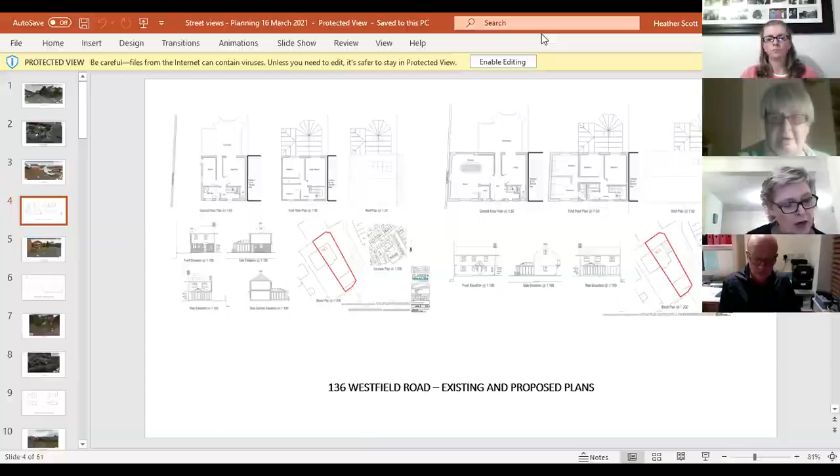The proposed 2-storey side elevation flank wall, due to its being built up to the boundary, appears to be overpowering and dominant on the street scene of Beeching Close, creating a possible loss of amenity to neighbouring properties within the vicinity. I express concern that the proposed 2-storey side extension is an over-dominant feature on the street scene, creating a possible loss of amenity to properties in Beeching Close. Concerns are also expressed with regards to insufficient on-site parking provision for the additional proposed 4th bedroom.

Thank you. And there were no letters of objection on the website at all. Okay, can I invite comments, councillors?

Yes, thank you, Rosemary. My question is, if the property is going to be built up to the side of the boundary line on Beeching Close, then does that not affect those trees along that side? And if it did affect those trees, what proposals are there for replanting under the neighbourhood plan? It may not affect the trees, but it looked to me very unlikely that it wouldn't.

Secondly, if the trees weren't there to screen it, would there be any overlooking to the properties across the road? Well, they haven't put in anything regarding replacing the trees, and that particularly was my concern, hence the reason I've put that it's going to be dominant and that it is going to be a loss of amenity.

Down to councillors - Nigel. Thanks, Chair. I concur. I've looked at this one, and my reaction is it's slightly overdevelopment. I think the idea of going right to the boundary - even if it was a metre back, so there's a passage down, would make all the difference. I think right up to the boundary is a no-no, I think it's overdevelopment. Plus the parking point.

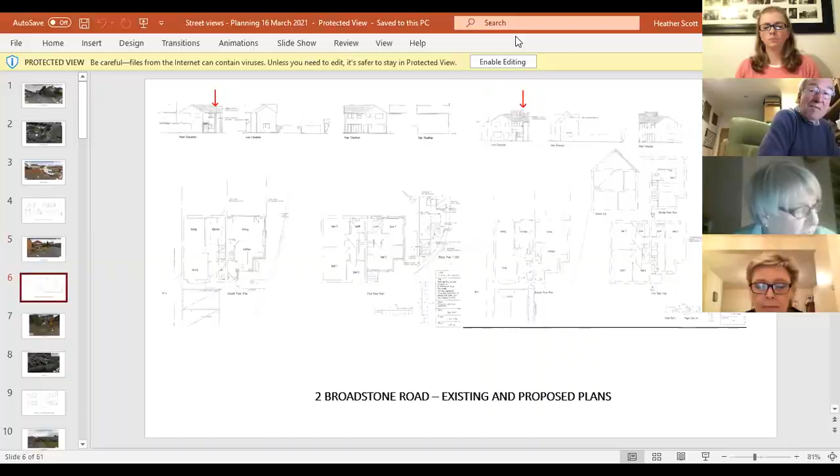Thank you. First of all, apologies councillors, this was actually the application where there were several objections online. I managed to turn over 2 pages, so I was reading wrong notes, but there were several objections online for this, just to mention. Quite a few were to do with concerns about safety, given its siting on a bend, but some also are about loss of amenity due to overdevelopment of the plot. Yeah, that's correct, on the site.

So John, do you want to comment? I was just going to say, I couldn't quite see because the plans are quite faded on the PowerPoint. I was thinking, where exactly is going to be the crossover and the access to the road? Because I do know that bend very well, and it is particularly tricky. I just wondered whereabouts, you know, to go back to the picture of the house, is it towards the front? At the moment, I think the access to the garage is at the rear. I wasn't quite sure exactly where the crossover was going to be.

Right, yeah, from what I remember looking at this, I think it was going to be further around the corner. Yes, I think from memory it was sort of in this location here. That's right. I mean, I think actually that's where the garage is anyway. But I think that is actually still quite tricky because you can see people coming down the left of this road here, straight down onto that corner there, it can be quite tricky.

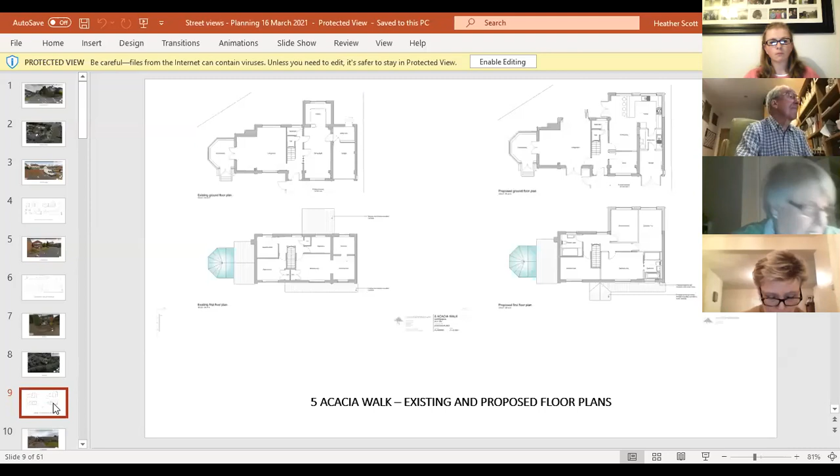Before I go into the details, just to let you know that a letter of objection has been received from number 49 Eastmoor Park. This property is currently a 3-bedroom detached bungalow with an integrated single double-length garage, set in a cul-de-sac which consists of bungalows at the end with larger, more dominant properties towards the beginning of the road. This particular part of Eastmoor Park appears to be fairly narrow.

The existing 3 bedrooms are housed in a loft area at the rear of the property. The proposal shows a first floor front gable over the existing garage, to include a dressing room and ensuite for the master bedroom, with a large glass window incorporated into the design. However, as no obscure glazing is detailed on the plans, there are concerns that this part of the proposal may affect the amenity of neighbouring property number 136 Eastmoor Park, sited directly opposite.

The proposed front dormer will accommodate a 4th bedroom. There are concerns that due to the narrowness of the road, there could be a possible loss of amenity also to number 136 Eastmoor Park due to loss of amenity and privacy. The proposed single-storey rear extension extends current habitable accommodation, with the garage area being altered for gym, utility, shower and office areas. With the loss of the garage and the proposed change from a 3 to a 4-bedroom property, there still appears to be sufficient parking provision on the front. No trees will be affected by this proposal.

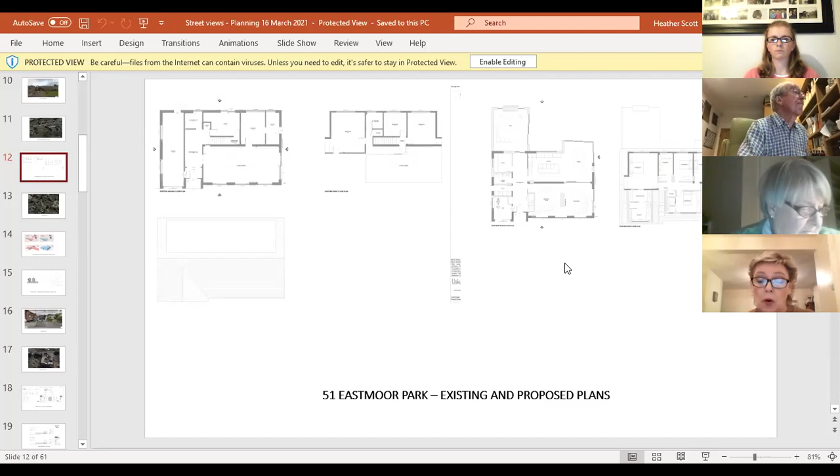Thank you. Right, do I have comments, councillors? I certainly agree that it looks to me rather out of keeping with the street scene, particularly with the two bungalows on either side. So, Paul Cousin, that is.

Sorry, thank you, Chair. The only thing I'd comment on is, ultimately, most people who live opposite a house likely have front windows that overlook their neighbour's front windows, whether it's a terraced house a few metres away or a bigger house 10 metres away. So I don't know, is that really too much of a detrimental loss of privacy? I don't know.

It's sort of normal, isn't it, in a built-up area, that with a house opposite, your windows are going to be opposite their windows. So I don't know really how bad that is, but we're only expressing concern. I'm not minded particularly to vote against the committee, but I'm just flagging it, whether it's a biggish window or a small window. If you're stood at that window looking out, you're going to see the house opposite.

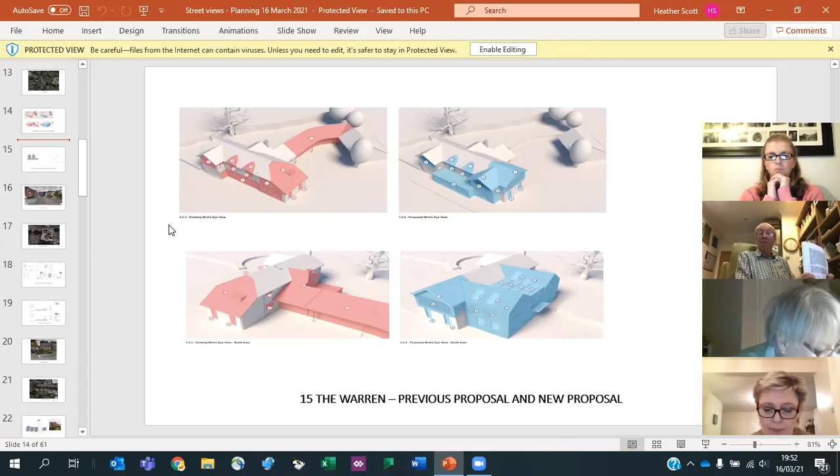There appears to be sufficient distance from surrounding properties to have no detrimental impact with regard to privacy and amenity. Consider no objection. There has been a letter of objection stating that there is an objection to the first floor study window, which is not obscured, and therefore they have a loss of amenity. They previously objected, and the application was, well, I don't know if it was permitted. I don't know if they got history.

No, it's under consideration, so. Well, we could always go no objection, subject to covering the glazed window, or say subject to no loss of amenity to neighbouring properties. I think there's quite a lot of distance between all the properties around. They're pretty big plots up at The Warren, so I would think it was a fair old distance.

I'm quite happy to go with no objection, but we can always add subject to no loss of amenity if we do that, just covers it. Are we happy to go with that? Yeah, thank you. Okay.

5/2021/0074 does not meet the criteria required for consideration by committee. The same for 0079 at 2 Highfield Avenue, although I'd note there are a couple of letters of objection which seem to object to the fact that putting up the fence, they're losing a view of the householder's previous flower bed. I'm not quite sure, but I'm inclined to leave it that it does not meet criteria for consideration by the committee, and then if the officer at district wants to look at it, they can. So we're happy to go with that, yes.

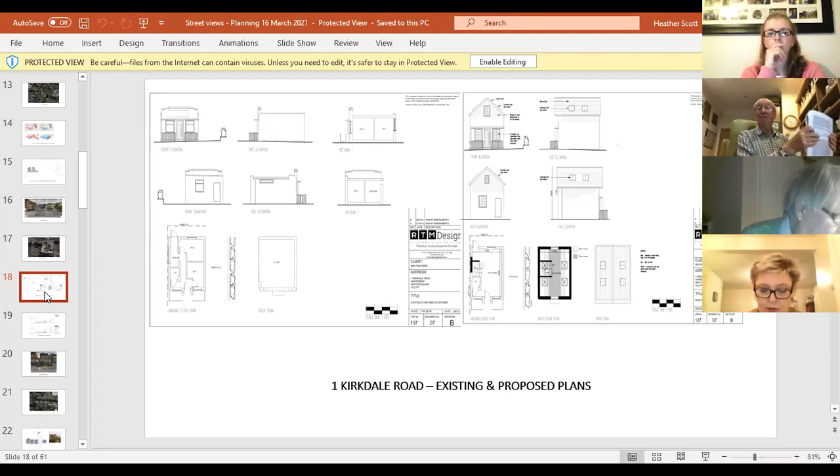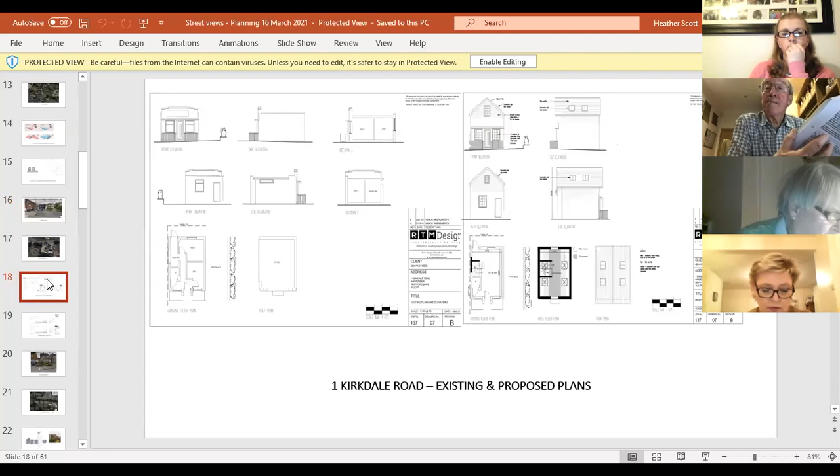Existing meterage of the building is 22 square metres, and the proposed alterations will increase it to 44 square metres. The property is set on a small site with neighbouring property number 3 Kirkdale Road, set back quite some distance. Host property has a driveway at the side between itself and number 3 Kirkdale Road, which leads to the rear of the property. Parking is not a requirement as travel requirements are met within Harpenden Town Centre and due to the overall meterage size of the property. No trees will be affected by this proposal. This property is in need of updating, and although sited in the Harpenden Conservation Area, the design appears to be in keeping with the area and the street scene.

Consider no objection subject to appropriate design and use of materials in the Harpenden Conservation Area. Looking on the website, there were comments from Highways who said they had no objection subject to previously received conditions and Highways information advisory notes, and suggested the local planning authority take information and any comments from the fire and rescue service. They were okay regarding parking and cycling provision for this. Letters of objection received from local residents said it was out of keeping with the street scene and that there was no parking provision.

Okay, have you got any comments, councillors? Yeah, I mean the building there has a history of being refused. Yes, Pip. Sorry.

Could somebody explain the difference in the class of the building? This proposes to retain the existing class use of the building, Class B1A, now changed to Class E. Does that mean part of the planning application is to change it from A to E, or that's already happened? That's the class usage, that's what it's allowed to do. So it's allowed to be used as office space and different things like that. It can't be used for residential, which it applied for before.

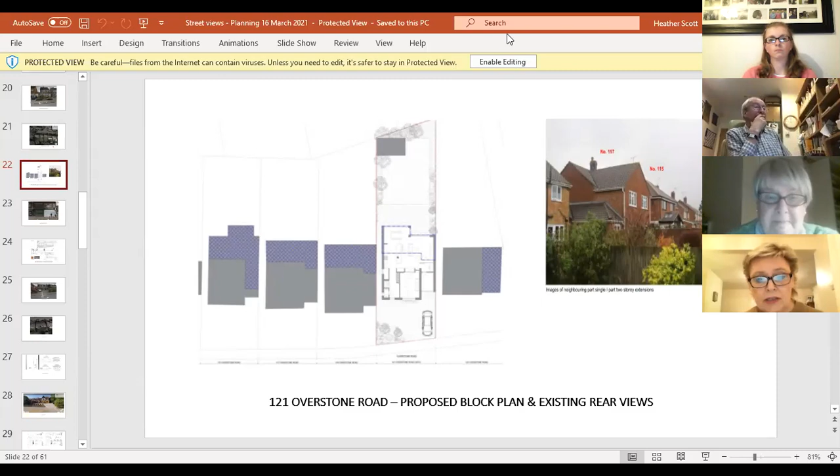It's down to councillors. I didn't feel that it would impact on neighbouring properties due to the fact that it was set within its boundaries. I couldn't see that the 45-degree rule would actually affect the neighbouring properties in any way, particularly since extending as well.

Matt: Thank you, Rosemary. Just a very quick one on the parking, because it did look significantly short on parking, as I could only see really space for 1 car if they're getting rid of the garage. I've got no objection to the principle of them extending the house, but given that from what I recall of Overstone Road, there isn't a lot of on-street parking down there, whether we should flag, not necessarily as far as express concern, but just flag with the planning authority at district that there might be very little parking with the new development.

Paul: I was going to raise that as well, so I would want to reinforce what Matt says. It's an area I know quite well, quite near where I live. It is congested and cramped. There isn't much off-street parking, and I think there's a bit of a principle there that it's part of our neighbourhood plan. It seems like it might be possible to get 3 parking spaces there at the front with, as you said, that small shrub bed that there is. But my impression is they might just think 'that's quite a nice shrub bed,' so we'll just try and get away with it by not mentioning that. In a road where there isn't a lot of other parking, I think we have to raise that as a serious concern, however we do it.

No other major changes are to be made. Pilasters, fascias and awnings are to be retained. The existing hanging sign is also to be retained, but with replacement logo. The new name for the restaurant is proposed to be displayed by way of halo illuminated copper lettering, with copper lettering to the existing hanging sign also.

These are shown on the plans and do not appear to be overpowering or dominant on the street scene. At the rear of the property, new timber windows and doors are proposed to be installed. We consider no objection, subject to appropriate design and materials in the Harpenden Conservation Area.

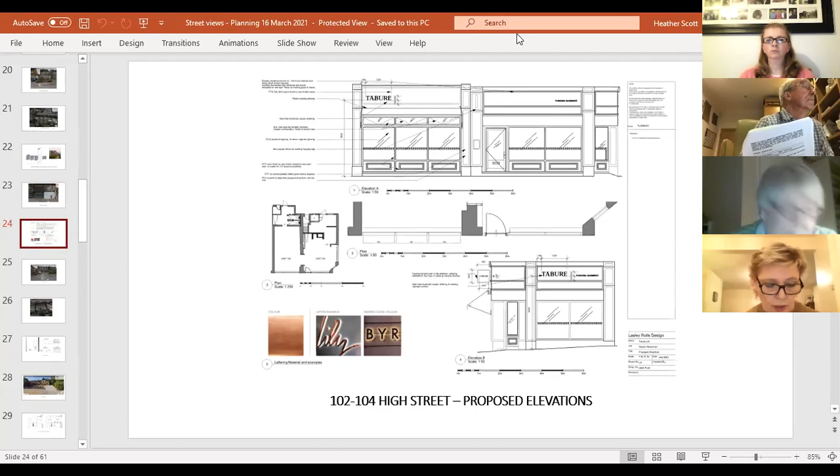So we had a letter of support from somebody at Glen Eagles, and we've had some letters of objection from neighbouring properties in Kirkdale regarding noise, traffic, parking, delivery vehicles, litter, waste, opening hours and infestation.

Wasn't it a restaurant before? Or takeaway? Wasn't it a food? It was a takeaway at Tahini's, and the other property, I believe, was an estate agent's, but it's been shut for some time.

Paul, Chair. I was just going to say that Tahini was a restaurant, but a very small one with maybe just a few single bar stools and then 2 or 3 tables of 4. So I guess the concern is that, especially over the last year, lots more people have been just getting it as takeaway.

Presumably the objection is that it's turning into a bigger operation, I guess, in terms of the numbers of diners that would be there.

My question was around the lighting, the signage. I can never remember, are we in general happy with things like backlit signage? I think so, I think it's an issue when it's internally lit. Okay, fine, fine.

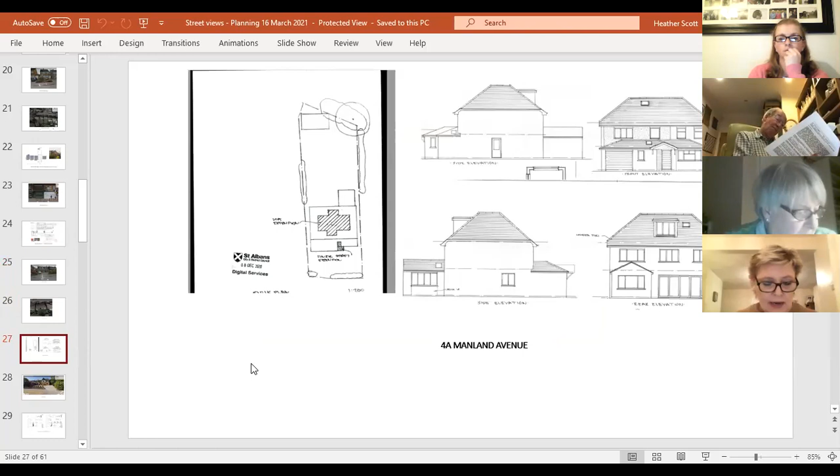The introduction of the proposed loft will incorporate a small rear dormer window and two Velux windows in the roof, one at the rear and one at the front. The roof line appears designed to ensure no loss of amenity to neighbouring property number 2 Manland Avenue, and suggests no detrimental impact on the street scene. Parking remains sufficient for the property, with the remaining single space in the garage and the large block paving driveway, which appears enough for at least 4 cars. No trees will be affected by this proposal.

Considered no objection, and no letters of objection were on the website either. Are we happy to go with that? Thank you.

5/2021-0366 at 16 Glemsford Drive does not meet the criteria for consideration by the committee. Similarly, 5/2021-0372 at 5 Chesterton Avenue, 5/2021-0418 at 64 Station Road, and 5/2021-0426, 5 Cornwall Road. And then moving on to 5/2021-0429 at 1 Dalkeith Road.

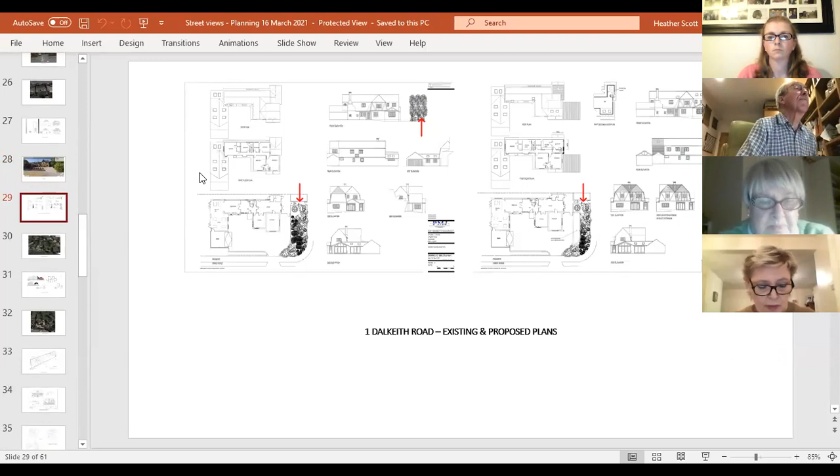Some pictures here. This application site is set on a large plot with adequate parking provision, including a double garage. The proposal is for a small first floor side extension, which will bring the first floor elevation in line with the building line of the utility room, thus allowing alterations to habitable accommodation. Sited behind the host property is number 57 Station Road. However, there does not appear to be any detrimental impact in terms of loss of amenity or privacy to this property due to the minimal increase to the first floor elevation.

The proposed carport is to be sited on the same side of the property, and it appears the existing shrub border may need alterations to allow sufficient space. Concerns are that the existing trees in the border may be affected. I put some arrows where you can see there's a line of about 3 trees, and I think they're going to be reduced to 2. That was my only concern.

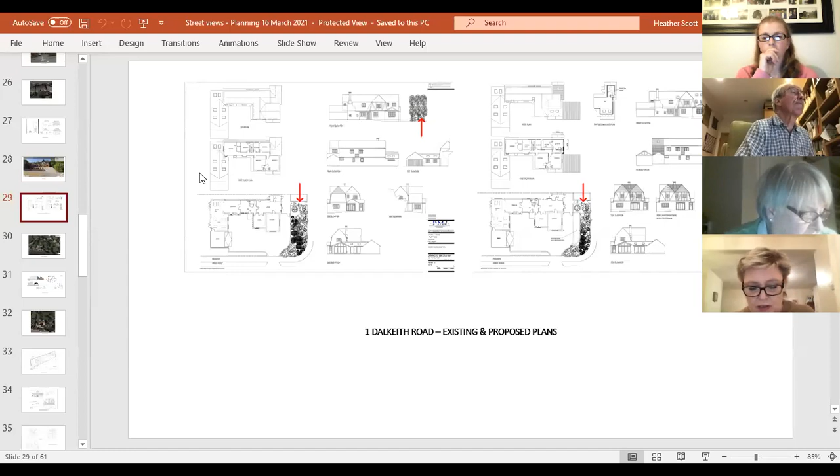So it's considered that, although there is no objection in principle, concerns are expressed that the proposed carport may have a detrimental impact on the trees sited to the side of the property. It's not absolutely clear whether it will or won't, so I'm happy to go with that recommendation. Is everybody happy? Yes, thank you, agreed.

5/2021-0150 plot 2, South Holme, Redbourn Lane, does not meet the criteria for consideration by the committee. 5/2021-0208 at 12 West Common Grove.

No letters of objection have been received for this one. This property is set in a road in the Harpenden Conservation Area, which borders the Metropolitan Greenbelt. It's a 6-bedroom property, and the proposal shows a suggested ground and first floor side extension with first floor accommodation to be contained within the proposed roof space.

The proposed extension is to be sited next to neighbouring property Grey Corners and appears to be screened by trees and shrubbery, which may create adequate protection for any possible loss of amenity or privacy. The proposed extension appears sufficiently subservient to the host dwelling, with a proposed roof design matching the existing. The supplied plans show the additional ground floor extension will be used as a study, with the first floor room to be utilised as an ensuite.

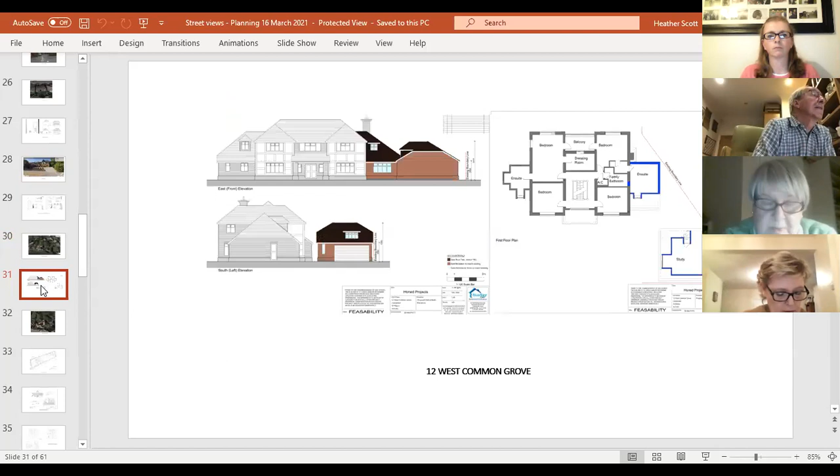So it's going to have a slightly different roof line. Whereas before it just had a normal pitched roof, it's going to have a different roof line to it.

But does that mean that flank wall is right up against the pavement of the road? Yes, it's there where it is now. It's the same position where the separate garage is now, up against the boundary.

I must admit I don't like it that big, that close to the road. I think it's already there, totally there. It is going to be closer and larger, to be fair. Yeah, it is going to be closer and it is going to be larger.

Just so that you're aware. Well, then if you like, we could go with no objection, subject to etc., and express concerns about the increase in the size and siting of the garage and its effect on the street scene. Yeah, I think that's fair because a lot of people walk past there and it is right opposite the common. And then the officers could look at it, but I think that perhaps will get round it. Are we happy to go with that, councillors? Yes, agreed.

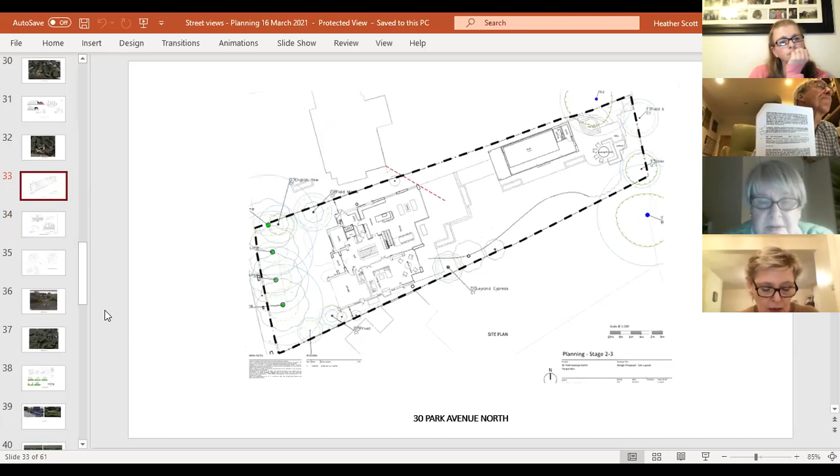Consider no objection in principle. However, concerns are expressed regarding inclusion of the balcony within the proposal, which may cause a possible loss of amenity and privacy to neighbouring property number 32 Park Avenue North.

Well, I'm happy to go with that. Any comments, or was everybody happy to go with that? Thank you. Yes, agreed.

The proposal for a replacement dwelling is for a property which is set in a road of similar style and design dwelling houses. The new proposed dwelling, which is to be a 3-storey property, appears to be set slightly forward on the existing front building line, although this does not appear to impact on neighbouring properties. Bedroom accommodation increases from 4 to 6, with on-site parking provision remaining sufficient.

On the rear elevations, the design includes balconies on the 1st and 2nd floor levels, which may impact on neighbouring properties in terms of loss of amenity and privacy. On the side elevation of the 2nd storey, a large side window for bedroom 5 is proposed. No details are shown within the application as to whether this window is to be obscurely glazed, and there are concerns as to how this might impact on neighbouring properties.

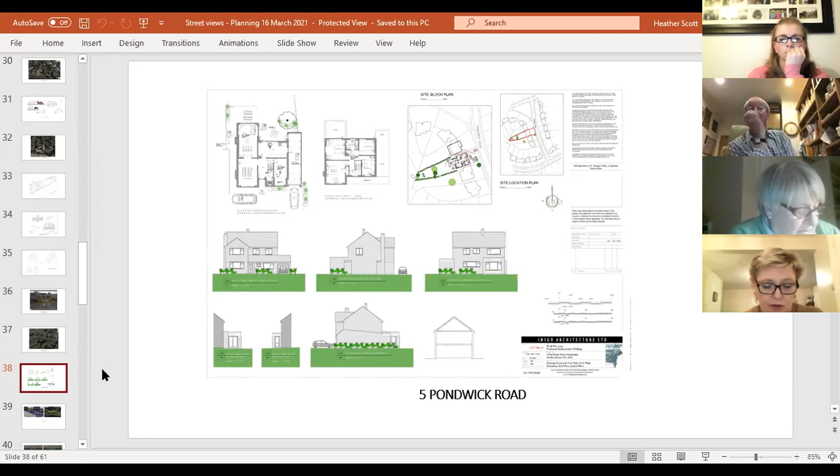No trees will be affected by the proposal. We express concern with regards to possible loss of amenity to neighbouring properties in relation to the proposed balconies and the glazed window on the 2nd floor side elevation. Thank you.

Do I have any comments, or are we happy to go with that? Nigel? Okay, I looked at some of the other details on this, and I was concerned about the height, the proposed height in relation to the adjoining properties. I don't think any of our slides show that at the moment, but I'm pretty certain when I looked at this in detail, that was my concern. The height of the building, the proposed building.

Okay. Rosemary, Pip would like to speak. Okay, Pip. I was only just going to comment that if the height is an issue, it makes the balconies more of an issue as well. Yes, looking right down. Yes, I think Mim's just having a look at the plans, aren't you?

Yeah, I'm just trying to find out what the height is, but I can't see anything that actually says what the height is. There's no details within the application that says how high it is. Well, in that case, perhaps we could. So if it's not possible to entirely work out the height, perhaps we can put something in to say further express concern that it is not clear from the plans how high. Or have you found the increase in height?

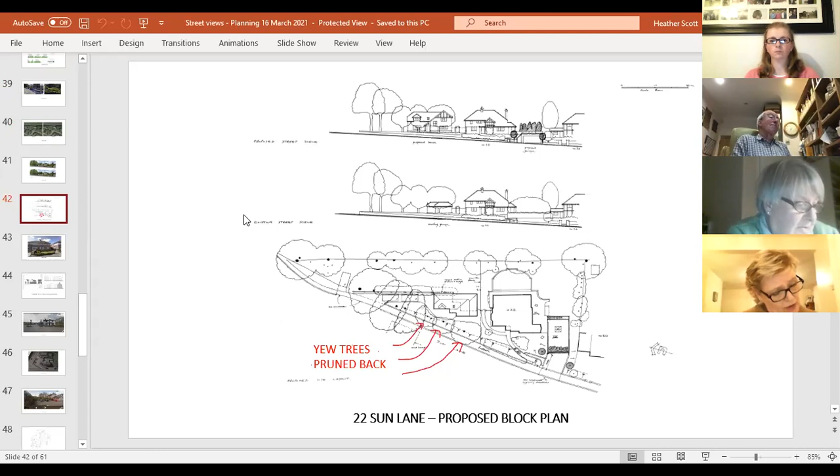Further concerns are raised with regards to the positioning of the proposed new 4-bedroom dwelling in relation to the trees lining the front of the site, which will be affected by the development and could result in future potential harm or loss. Parking provision for both of these properties does not appear to be sufficient.

There was one letter of objection regarding materials of the property from a local resident who said there wasn't enough brickwork in the actual new property to match the street scene.

Network Rail commented and said there was no objection in principle, but the requirements that must be met when working near the railway must be dealt with.

Highways commented and said they were unable to support the application regarding parking, as it was unclear on plans regarding visibility splays and possible loss of parking of up to 5 parking spaces in the parking zone, and they need permission of the local planning authority. And they in fact recommended refusal. Yes, they did.

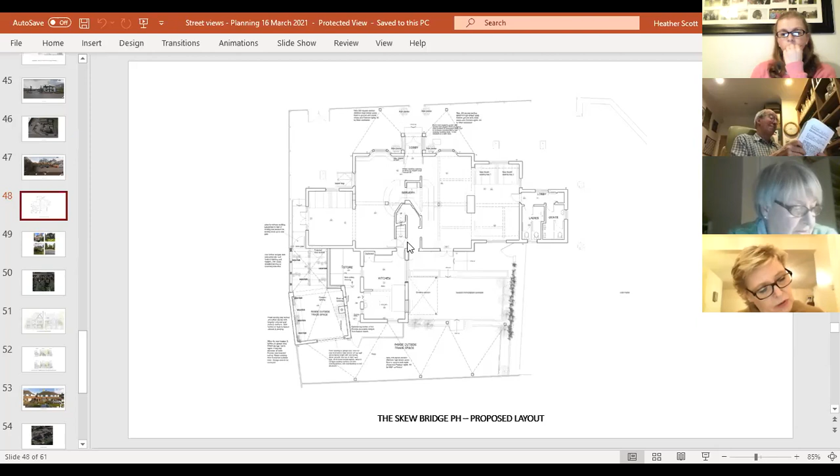Yes, because I would have thought if there's light pollution for the property on Queen's Road, the same could apply to the properties facing it on Southdown Road.

Right, do I have any comments, councillors? One has sympathy with any hospitality venue that's looking to improve its offering and bring people back in. However, it is in a residential area, and due cognizance has to be given to the amenity of the residents.

So do I have any comments, or are we minded to go with the recommendation? Yep, I think so. Pip, are you in agreement? Yeah, thank you.

5/2021 0446, 23 Milton Road. Again, no letters of objection have been received on this one. I think we got some pictures. Yep, here they are. Right, thank you, Hev.

The property is a locally listed building set in the Harpenden Conservation Area and is located in a tree-lined road, sited well back on its plot. It is a 3-storey dwelling and has a horseshoe driveway with plenty of parking provision.

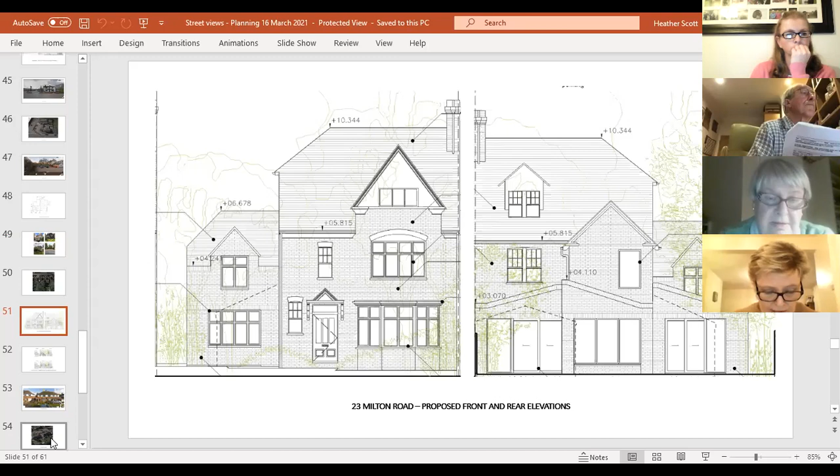The property will increase from a 4 to a 5-bedroom property with sufficient on-site parking provision. The amenity of neighbouring properties does not appear to have been affected, with the 45-degree rule being complied with. Concerns raised at the pre-application stage appear to have been addressed. No trees will be affected. Consider no objection subject to the appropriate design and use of materials on this locally listed building sited in the Harpenden Conservation Area.

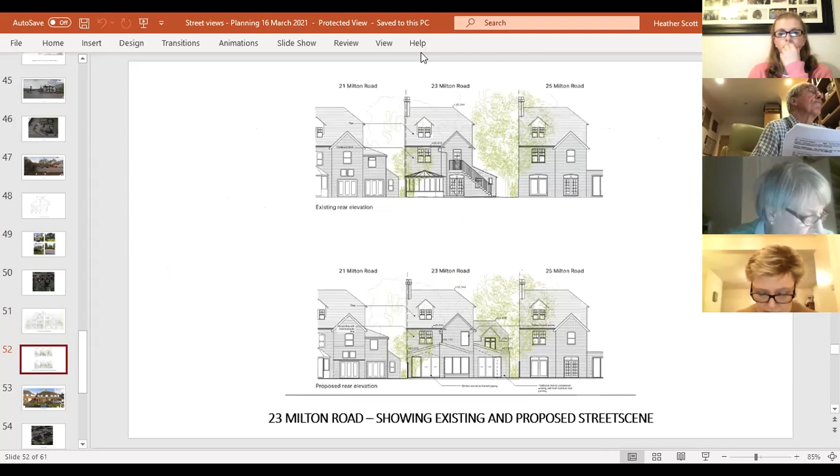Thank you. Any comments, or are we happy to go with that? It looks okay to me. Okay, thank you. Agreed.

5/2021 0424, 8 Tylers, does not meet the criteria for consideration by the committee, and the same applies to 5/2021 0160, and 5/2021 0176 at 12 Ridge Avenue.

A letter of objection has been received from a property in Luton Road which backs on to Ridge Avenue, stating that 12 Ridge Avenue is in an elevated position, that no other properties in Ridge Avenue have dormers, all have Velux windows, and that the proposed dormer will be too intrusive and will set a precedent.

The proposal shows a 2-storey side extension which is subservient to the main dwelling house and is pulled in away from the boundary of number 14 Ridge Avenue in order to avoid a terracing effect. The proposed roof line matches the existing.

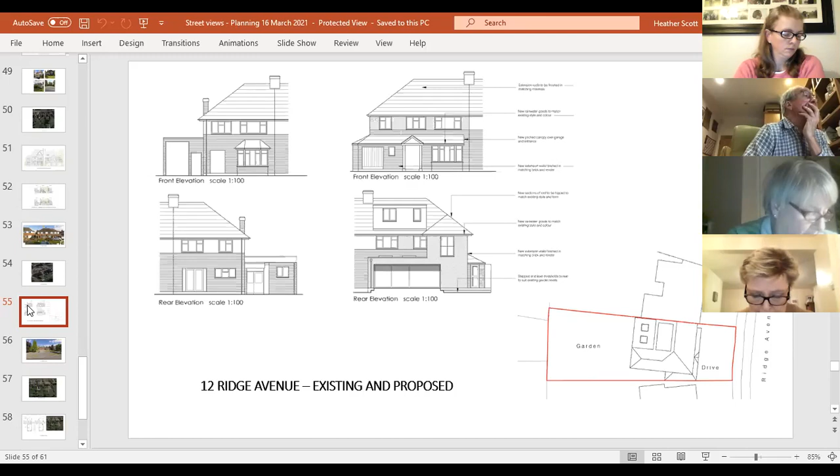Due to the siting of the property on the site, the 2-storey side extension will not have a detrimental impact on neighbouring property number 14, and the single-storey rear extension does not extend far enough along the side boundary of number 10 to have any detrimental impact. The block plan is marked showing the frontage as a drive, but it is unclear how many parking spaces are provided for the increase in bedroom accommodation. No trees will be affected.

Consider, as no parking details have been sufficiently detailed within the application, express concern with regard to the loss of the garage and the proposed increase in bedroom accommodation, that there may be insufficient parking provision for this proposal.

Yes, since we don't know, I just wondered whether we might prefer to say consider no objection, subject to it being demonstrated that sufficient parking provision will be made.

Matt: I've not been inclined to go with that, simply because with a 5-bedroom property, I'm not convinced that without taking out almost the entire front garden, you could get enough cars on that drive to meet the provision. So I'd be inclined to leave with express concern as okay.

Because I'm not sure they're not the same thing, but anyway - Paul: I agree with Matt in that I think we shouldn't go for a slightly more relaxed view, which is subject to. We should express concern again on the principle - this neighbourhood plan's been around for 2 years, they should address it, not just okay, hoping that we don't notice. Okay, fine, I'm happy to go with that.

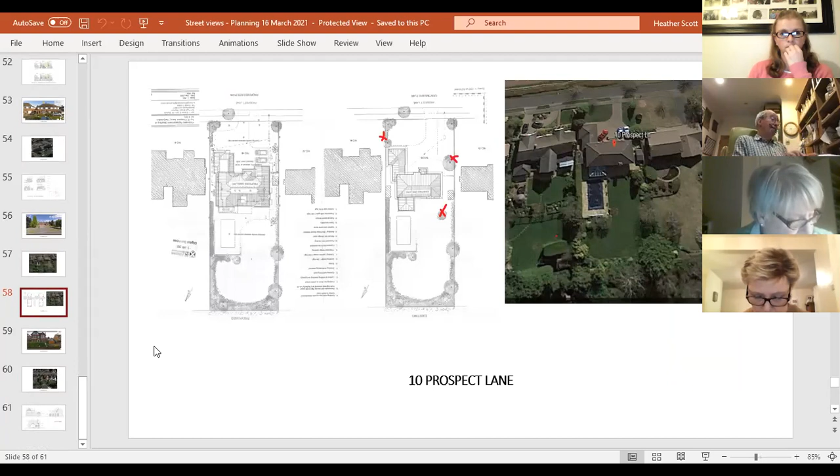Consider no objection in principle, however express concerns that policy ESD14 of the Harpenden Neighbourhood Plan has not been addressed, and that replacement trees should be replanted on a 2-to-1 ratio. Is that right, 2-to-1 ratio? Yes, that's right, it's 2 for 1.

Okay, Matt and then John. Thank you, Rosemary. Given the size of the plot, I'd be inclined to be less generous and take out the first 5 words of the recommendation, so it's just express concern.

John: I was actually going to go further. They're replacing 3 with 2 on a plot of significant size, and to not at least replace it 1 for 1, I think is undermining the policy. On a plot that size, if we can't get the trees in line with the HNP, in line with the plan, on something that size, then I'm not sure we're ever going to be able to apply it. Therefore I would recommend refusal.

Okay, how do we want to go? Do we want to go refuse, or concern? Nigel, and then Paul. I think they're agreeing with you, saying expressing concern. Oh right, okay, I mean I hear what you say John, and I think you're right. Problem is, because we know it won't get refused, I mean I think if we...

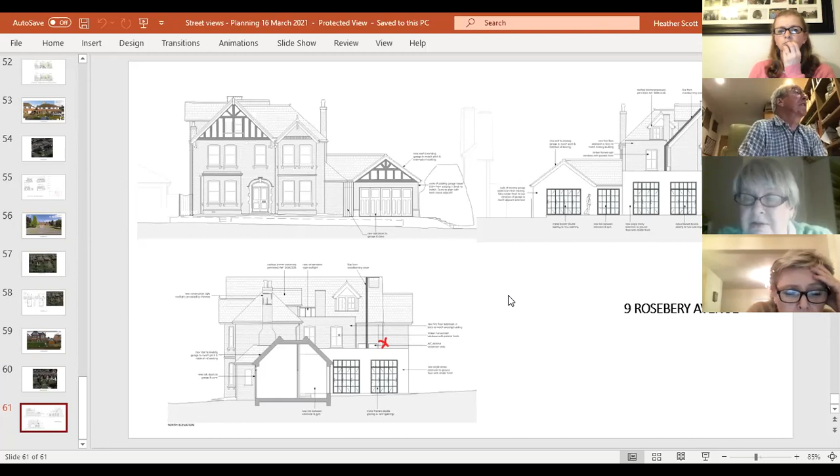Knowing this street, because I live in the street further along, I don't remember it coming out as a big wall against the property next to it. It's a bit difficult to work out how much from the side.

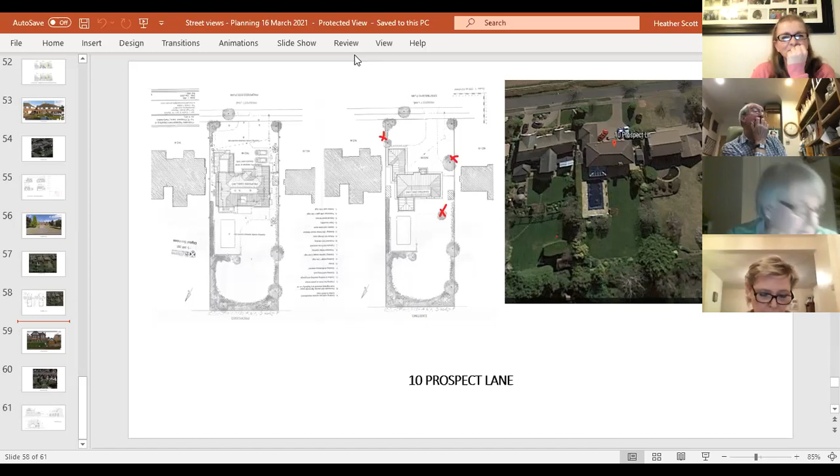From the side, it doesn't really look like a house. It more looks like a hotel or an old person's home or something, with all the different additions - it's something you'd expect to see a fire escape at the back. But I don't know how much that is visible. Certainly from the front, I would hope that it would retain its character and features.

Well, I think I would go to refuse with regards to the proposed air conditioning, and as we said, it's in the conservation area, and I would add the effect on the street scene, and I should add in as well concerns about the...

Overall, do we want to say the effect of the proposed rear dormer windows - it looks like it's on the roof - the effect on the street, or something along the lines of the effect on the street scene in the conservation area.

I do want to say the fact that it's locally listed, almost like the effect on the heritage.

Yes, I think we could go in and say, on the basis that it would appear that elements of the proposed design and alterations are not in keeping with the heritage of the listed building in an iconic part of the town. How's that sound?